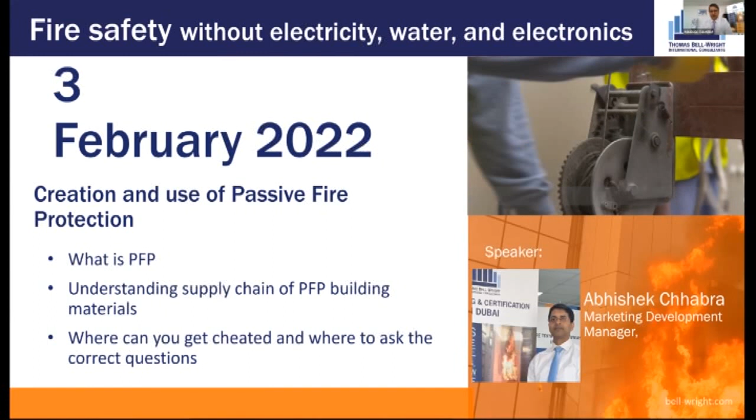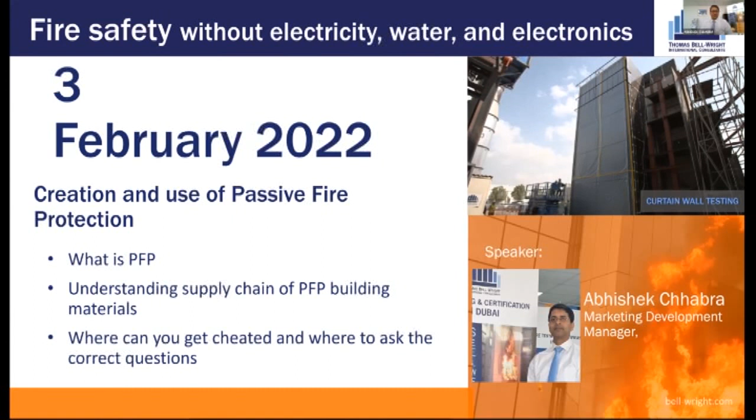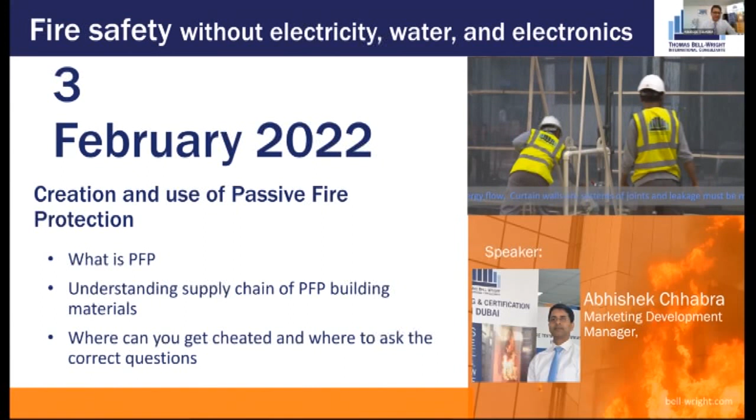Very good evening to Milind and Navdeep, Vikas, Vilas. Please do introduce yourselves. Hello Anil, good to see so many familiar faces coming online. Hello Sandeep. Do share where you are all logging in from. Hope everyone is safe and things are nice around you. Hello Hamid, Sandeep, Nishant, Amit. Good to see you, Nishant. Lots of good friends, familiar faces. Neeraj, Girish, Ganesh, hi. Baha, hi Baha, how are you? Good to see you all. Lots of names. Hello Vikas, Shiv, Siddhant, hello Hema.

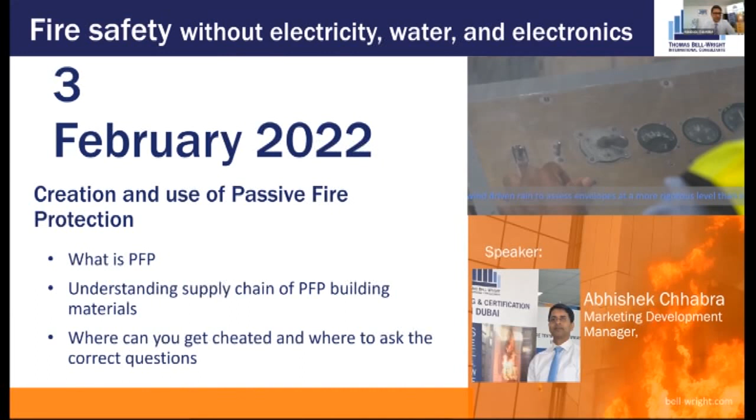Hi Sudhakar, thanks for the lovely introduction. Good to know you're working in Passive Fire. I will be in Mumbai in the week of 14th. Would love to connect up, maybe not coming to Gurgaon this time, but yes, we should connect. Thanks Sudhakar for the introduction.

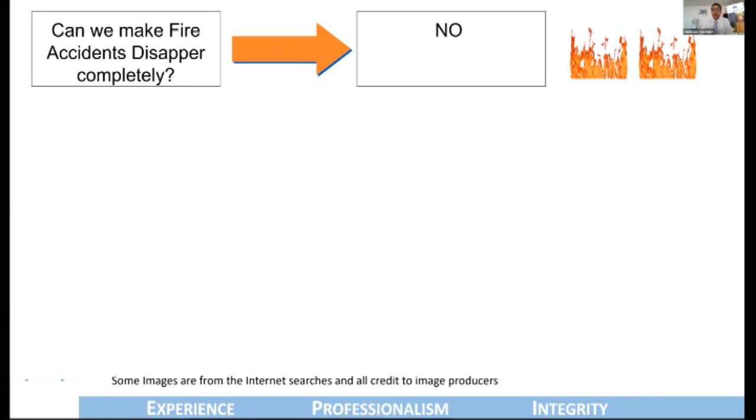There will always be small accidents, small incidents that will trigger a fire inside a building, inside a house, inside a shop, inside an airport, inside a hotel, inside a hospital - any imaginable place you can think of. There will be a source of potential ignition and some or other kind of mishap that will create a fire. So we can't really make a fire accident disappear. We know this. But what can we do?

We can do one of several things. We can make sure that the fire gets detected very quickly. We can make sure that wherever the fire is happening, there should be a means of egress so the place can be evacuated quickly. We should have a mechanism that is able to extinguish the fire, whether it's a small mechanism like a fire extinguisher or a sprinkler system, or maybe have the fire brigade come in, take charge, and control the fire, limiting it so that the small incident, which will always happen, will not become a big disaster. And we can all do this.

Like the caption of today's webinar says, we want to make sure there is inherent fire safety built in - something that does not require electricity, something that does not require water, but is still able to protect. So what can we do?

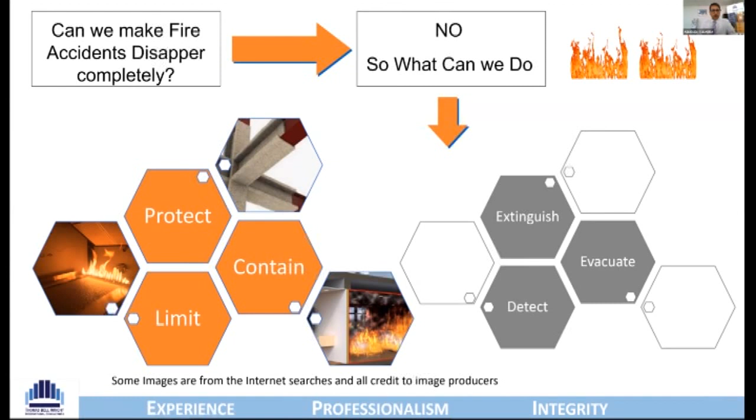I'm going to focus on three aspects today: what will make sure that the infrastructure we are in is protected from a fire, and if there is a fire incident, that it is contained within the compartment, the zone, or the section where the fire has started. If there is a small ingress of fire, it could be a matchstick falling on a carpet, a short circuit in the corner of a house or room, a stray candle, or so many other possibilities, we make sure these fires are limited.

So I want you all, wherever you are sitting, to take about 10 or 20 seconds to look around you and just think about where you are sitting. You could be in an office or a house, sitting on a table, a chair, or a bed. Look around the room that you are in.

Imagine if there is a fire that breaks out somewhere around you, what would happen? Please do this exercise with me. Imagine there are windows around you, hopefully a door somewhere, and a roof above, maybe a false ceiling. I'm running a small video on your screen for you to imagine when a fire gets initiated, how it spreads across the room.

Are you with me? I hope you are all able to imagine, look around, and think of all the things that will burn, some more quickly, some less quickly. Where will the fire move? Will it be contained within the room where you are? Do you think the door, wherever it is, will be able to lock the fire and smoke within the room? Will it burst out of the window?

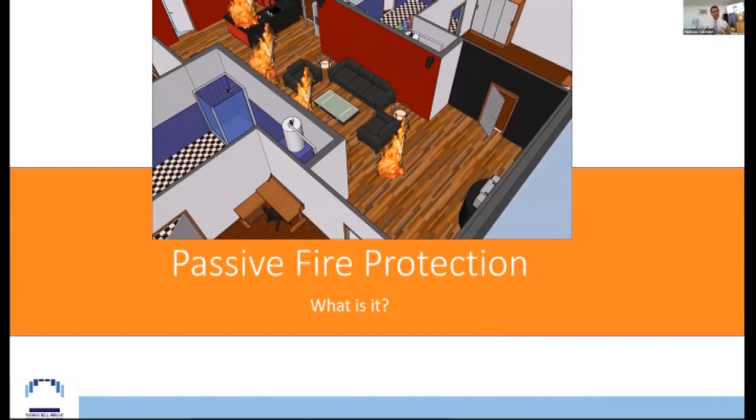This all forms the basis and the crux of how fire protection gets designed across the world in buildings. We have codes, standards, regulations, and requirements detailed in hundreds of thousands of words and pages, but in basic essence, this is what we are looking at.

We know there will be a fire. We have to understand, from a very scientific point of view, how quickly it can be detected and controlled, and design an egress so that everybody who can potentially be in harm's way can exit and evacuate. On the other side, we have passive fire protection, which means if there is a carpet on the floor, a false ceiling, or a decoration on the wall, this will not make the fire run and grow quickly.

What will be the fire load? How much can the fire grow? And when this fire is growing faster and quicker, we have elements in the room like a fire-rated door, fire-rated partition walls, fire-rated roofs, and fire-rated perimeter fire barriers between the windows or glazing and the floor. All those elements are in place to make sure the fire is contained within the compartment that has been created.

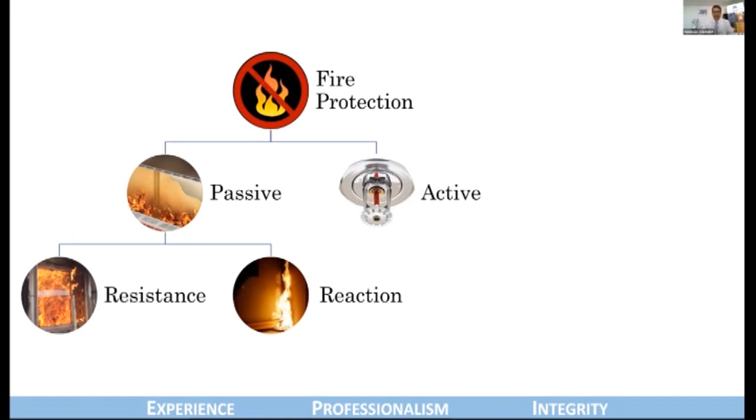This very simply is what is called passive fire protection. It usually gets grouped into three segments. Containment, which means if and when there is a fire, it should be containable either in a room or the floor, or by whatever methodology has been designed by a fire code, keeping in mind the occupancy type.

If you are in a hospital, the methodology to contain a fire will be very different compared to if you are in a mall, an airport, a residential or commercial building, or a place of worship. All these categorizations define how many people there are and their preparedness to evacuate or act when there is a fire. All of this is beautifully captured and recorded in various building codes, whether it is the National Building Code of India, the International Building Code published out of North America, or one of several other building codes around the world.

These building codes will define how many hours the containment of, let's say, the banquet hall of a hotel, which could seat 2,000 people, should function. How long will it take to evacuate people?

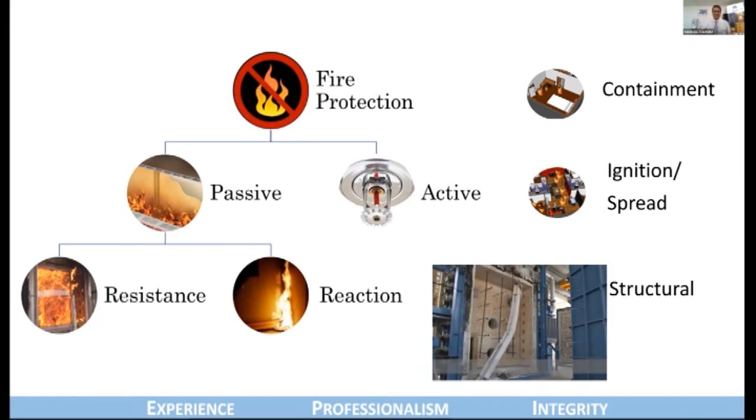Let's take a better look into what reaction, resistance, and all of this is about. I will start with materials, stuff that probably you can see around. Maybe you can see some table or pieces of paper on it. I am very sure you can see something around you in some form of plastic.

And plastic is a big category, but you would definitely have paper somewhere inside, and plastic somewhere inside. I want you to imagine, if you light up the piece of paper with a matchstick or a lighter, you will all agree it ignites very, very quickly. And a plastic chair or a plastic bottle or a water dispenser may not necessarily ignite with the help of this lighter.

As you imagine the lighting up of fire - and I urge none of you to do this right now, please don't try to light up something around you just to follow the webinar - you will realize that paper could ignite very quickly, but not necessarily create a lot of energy. Its calorific value or fuel load will be low.

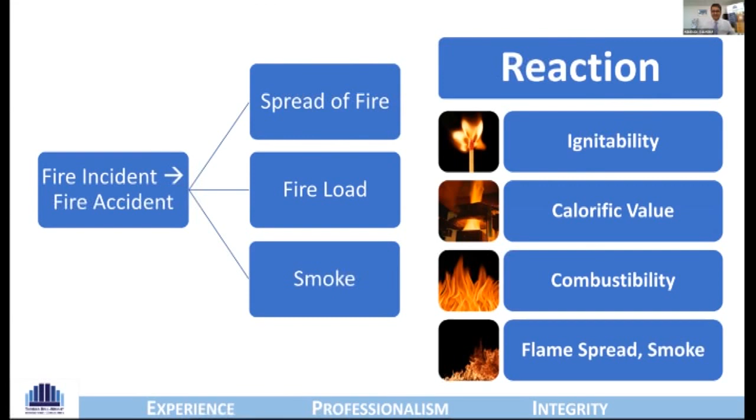I move to my favorite subject, which is compartmentalization of fire. Very unfortunately, it is half understood or semi-understood by most people. The ill result of this half understanding is that many times developers, contractors, consultants, governments spend a lot of money defining that a room should have a 2-hour fire rated door. But if the wall is not fire rated, or if the mechanical, electrical, or plumbing MEP systems break in and cut open the fire rated wall and do not seal it back properly, then the huge amounts of money paid to manufacturers, some of whom are actually today in this session, is wasted.

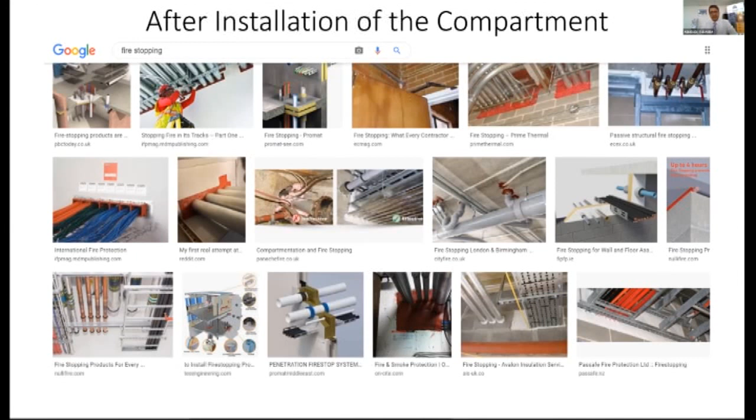Let's look into how this is actually and practically done in real life. Three aspects are important. Who is the manufacturer of the product? You should imagine a fire door, a partition wall, fire stopping products, all sorts of systems and materials that you see all around you, above and below, which are capable of creating this containment.

We need to ratify and check whether these manufacturers are able to deliver the right product repeatedly - not just test one product and give you a test report, but supply products that will always comply to what they claim to comply. Who installs these products?

Are the installers capable? Are they trained? Is there someone checking their work? Or are you wasting money designing and procuring very good products and getting them installed wrongly, wasting all of the money spent?

And most important, if you are paying somebody - if you are a developer, a contractor - are they liable for ensuring what they are delivering? Is that liability written somewhere on a piece of contract or a document? Is there money attached to it? There better be money attached to it.

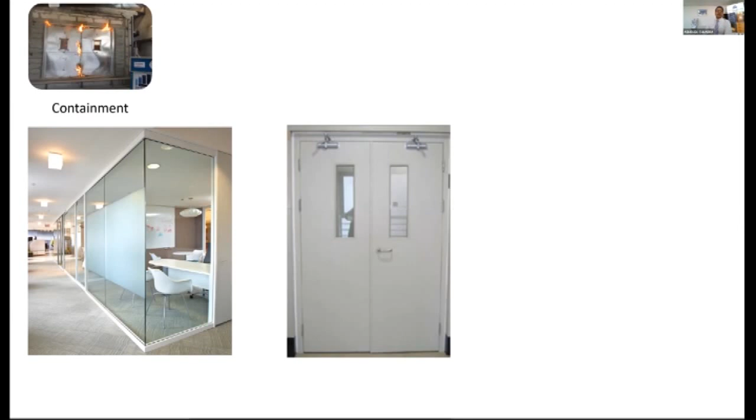Just to aid your imagination so that you better understand what I'm talking of - imagine, as in the top left corner of your screens, you see a fire door being tested, which means the fire door is installed with a furnace behind, and fire leaking out, which means the fire is not being contained. And below you see images of systems and products like a fire door or a glazing system that is supposed to implement or contain the fire. Then imagine all that goes behind it.

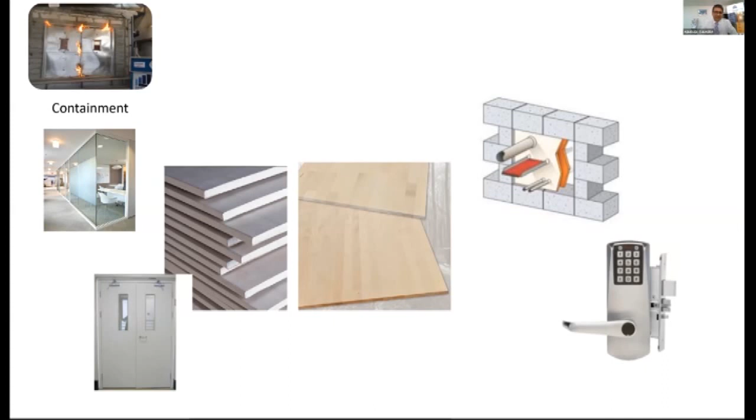Who is manufacturing using boards, wood, sheet metal, hardware, etc. We need to find a mechanism to ensure that this is being done correctly and repeatably. Exactly the same set of things I want you to imagine for anything and everything that you look around - interior finishing materials and products, upholstery, carpets, flooring, false ceiling, furnishing done on the walls, wallpaper.

Will they catch fire? Maybe, maybe not. But where are they manufactured? How are they manufactured? Is there a quality assurance mechanism in place or not?

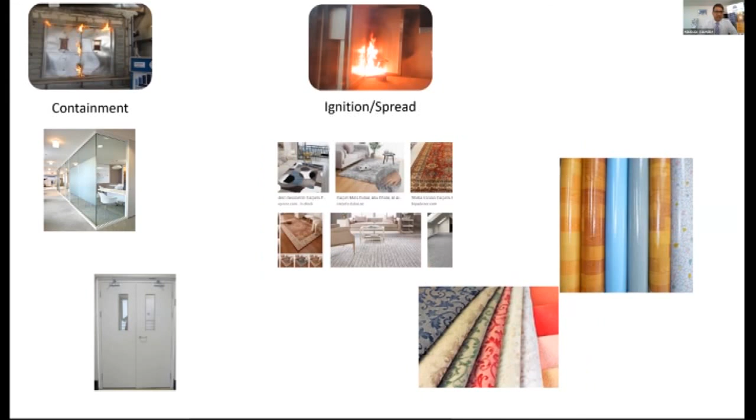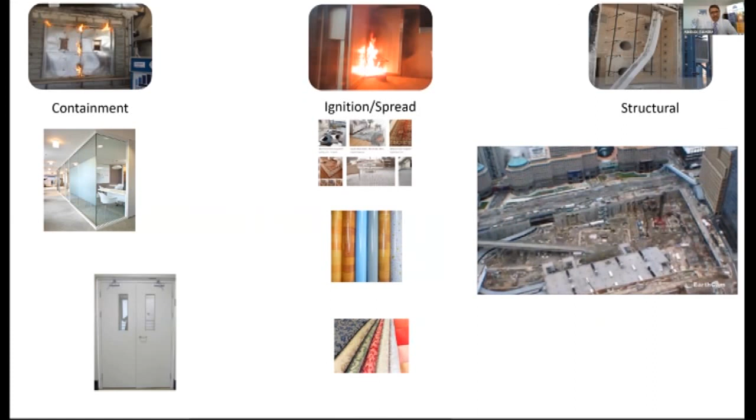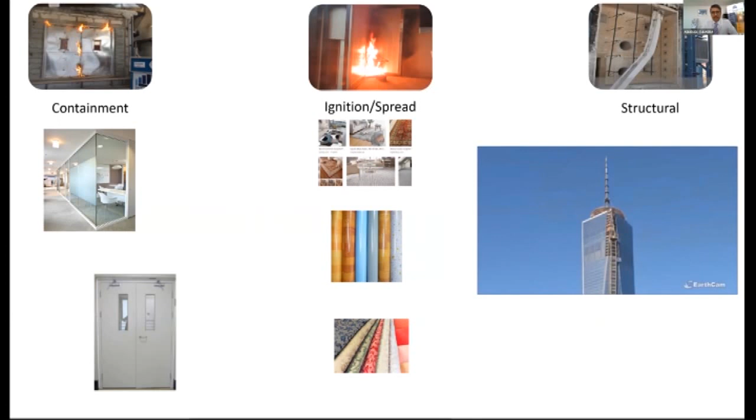Structural fire protection is a subject probably for another presentation. But whenever a fully developed fire is attacking the structure of a building, like the world saw when the tragedy of 9/11 happened - and this is a video of the building which is the place of the tragedy - the world realized and understood much better that when the fire temperature is beyond, let's say, 500 to 600 degrees for a prolonged amount of time, the structure can potentially collapse.

And hence, a lot of coatings, intumescents, and many other methodologies and products, sometimes boards, are used to bolster the structural strength of columns and beams to make sure that there is structural strength in the building. How is this evaluated? How is this tested?

If a column is slightly rusted and the intumescent is coated on top, and the intumescent is not able to hold correctly to the column, then procuring the column, paying through your nose for the intumescent coatings probably imported internationally, and paying someone to install it incorrectly, is losing all the money. So it is critical and important to understand this. And I cannot impress more upon...

...misunderstanding of through penetrations and the amount of money spent on it. Roughly 35% of contract value of any construction is spent on MEP - 35%. So if you spend 100 crores building something, you spend 35 crore rupees on MEP. And having a wrong installer, an ill-qualified installer, will break the through penetrations, the compartment, and not fill it properly. So imagine the impact.

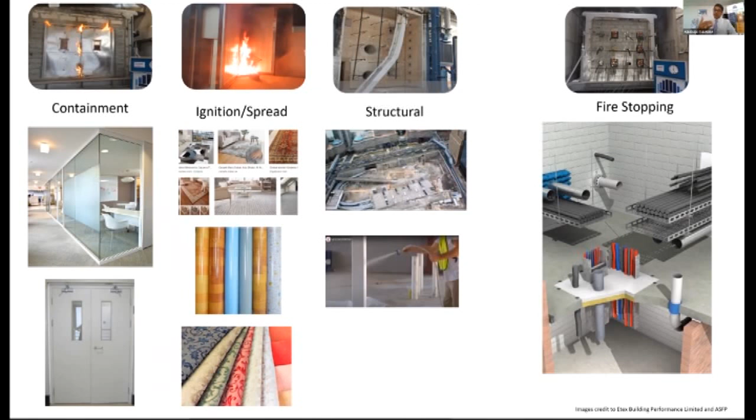So it is critical to understand how the installations are done, whether they are certified and listed. Is there an inspector involved to check and make sure that these are being installed correctly or not?

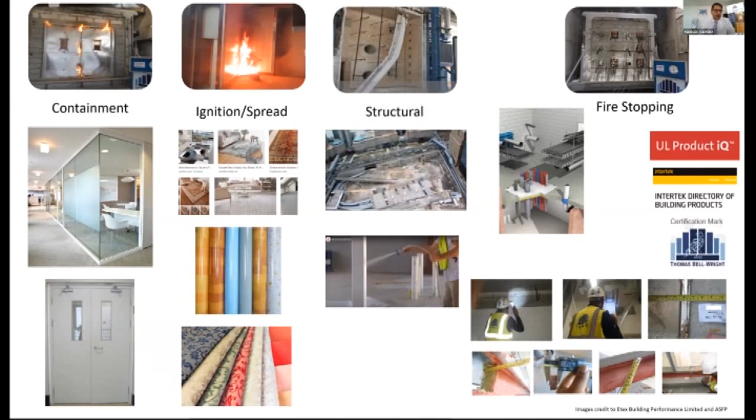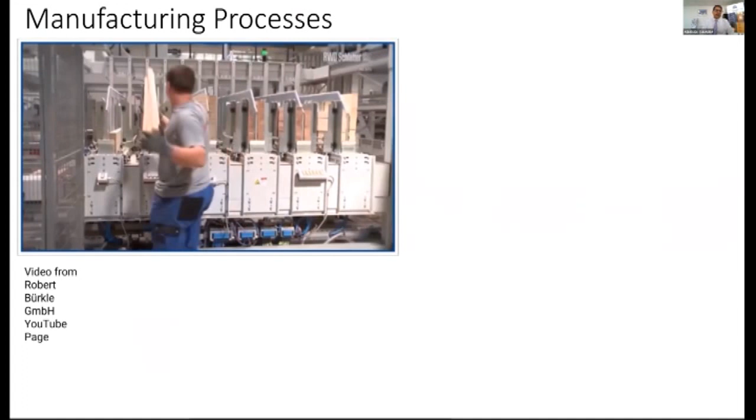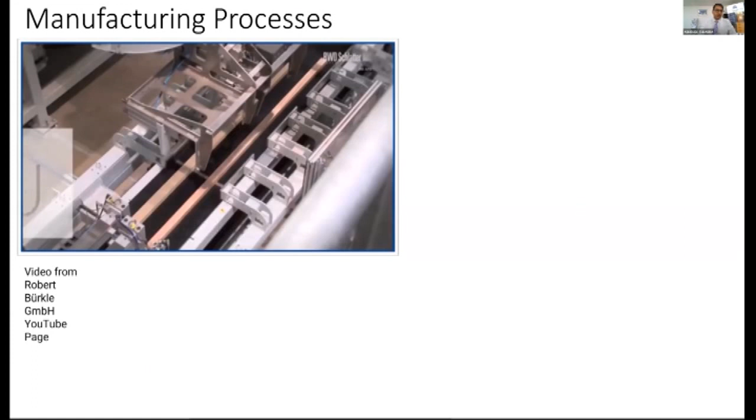Why is this important? I want to bring your eyes back to manufacturing as a process. It's easy for people to imagine that fire doors are manufactured like an automotive production line, everything happening on its own with minimal human intervention, everything automated. But reality is very different.

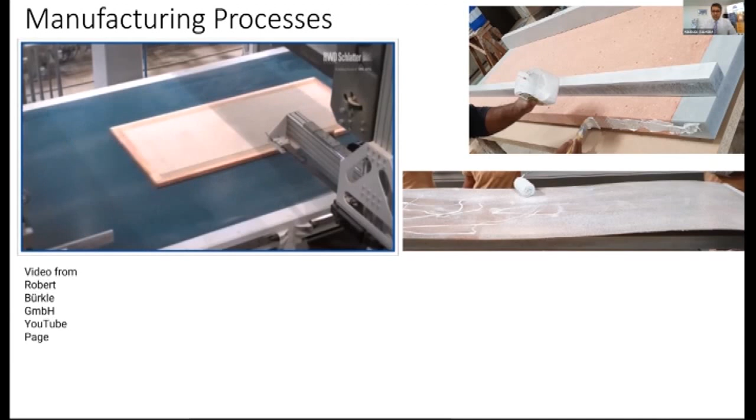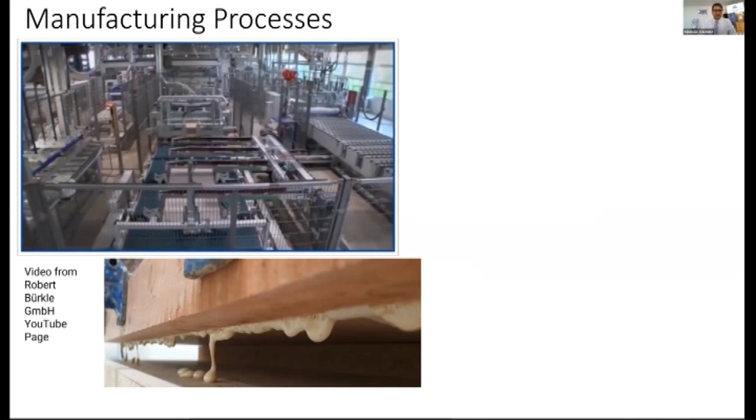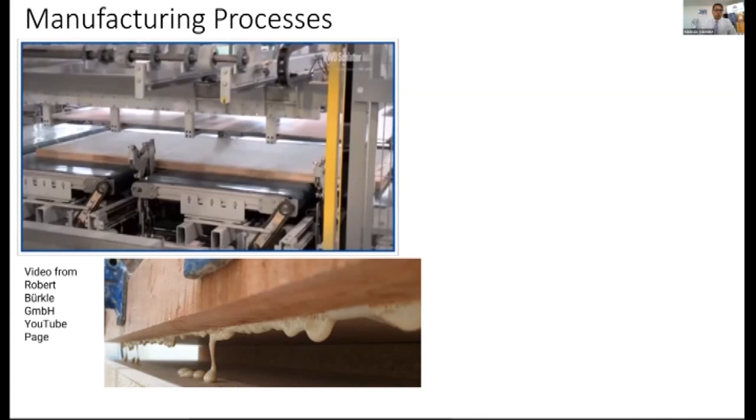I know there are some fire door manufacturers here, and I hope they don't get offended, but manufacturing and assembling a fire door has a lot of manual work, not just in India but worldwide. Using sealants, intumescent strips, and loads of components which bring about fire resistance, if done incorrectly, would produce a different door. So it is important that somebody is overseeing and ensuring this process is done correctly.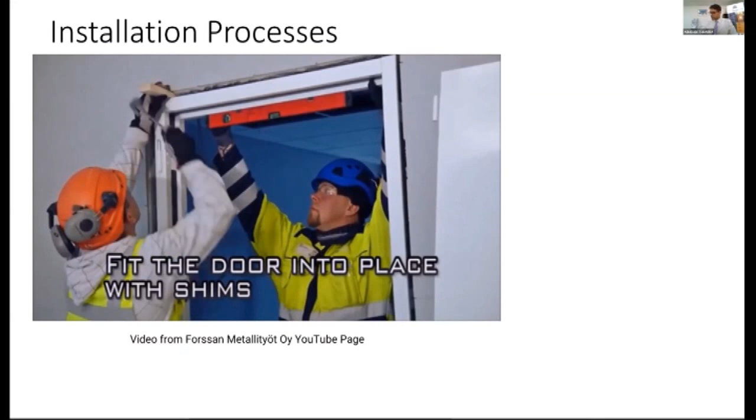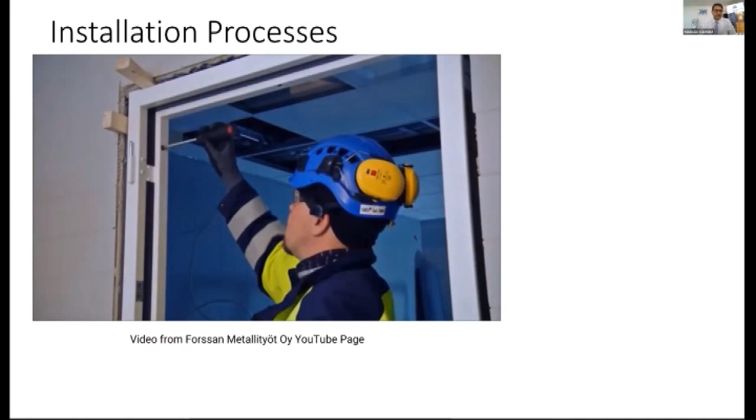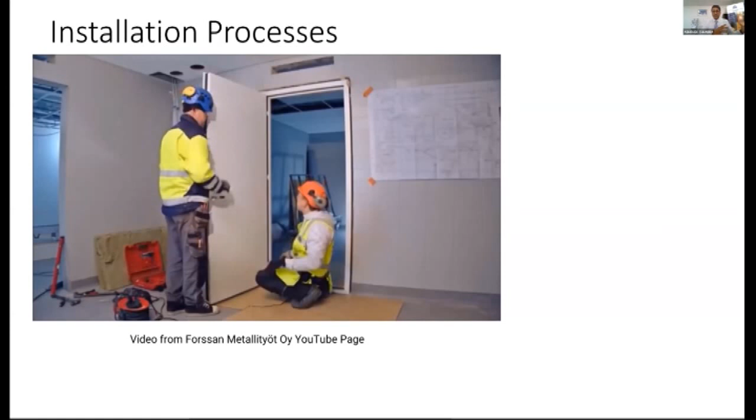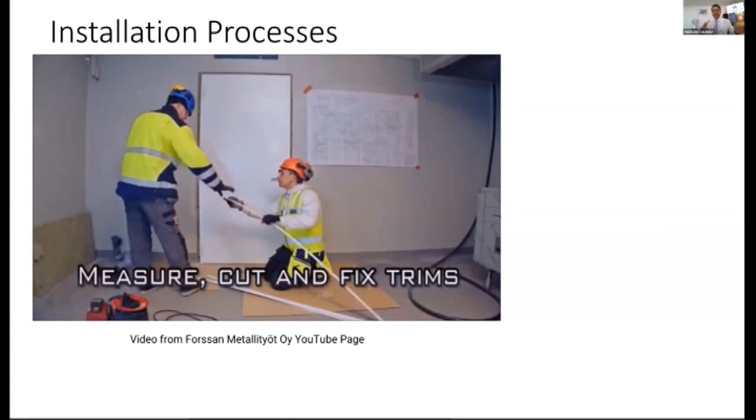The same goes for installation. This is extremely important work, often misunderstood. The liability that a fire door will perform as a fire door primarily goes on the manufacturer of the fire door, the same manufacturer who will install the fire door correctly, very well, in a laboratory to test it. And it can be your guess that the experts who install the fire door inside a laboratory, when they are spending a few lakh rupees to test it, who these installers will be, what will be their capability, and does this equate with the capability of the installers at the construction site?

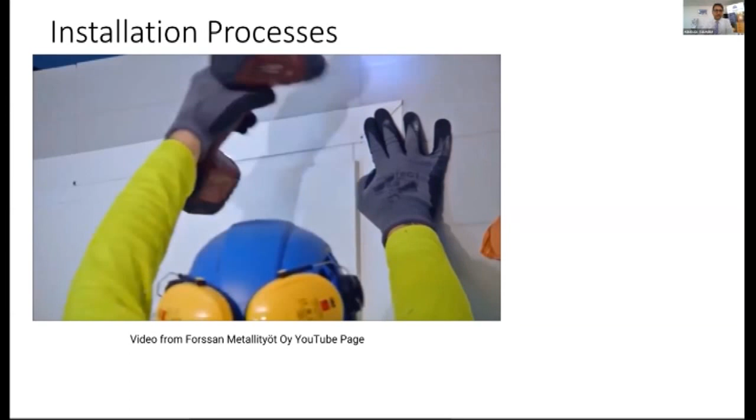And if it does not equate, then all the money being spent is probably being wasted. So it is critical for you to know and understand that the liability, which typically comes from an installation process, which has to be issued ideally by the manufacturer, is verified, and there is some mechanism to assure it.

Which brings me to the last section of today's conversation and discussion, which is assurance mechanisms. How do you make sure, wherever you are - you could be a manufacturer, a buyer, a seller, a contractor, a consultant, a property dealer, or an insurer. There are so many people today in today's session.

Well, we could start with just the basics: have a building code and follow it to the T, exactly, correctly. And in every building code, you will see test methods, like what are the test methods used to check and validate compartmentalization.

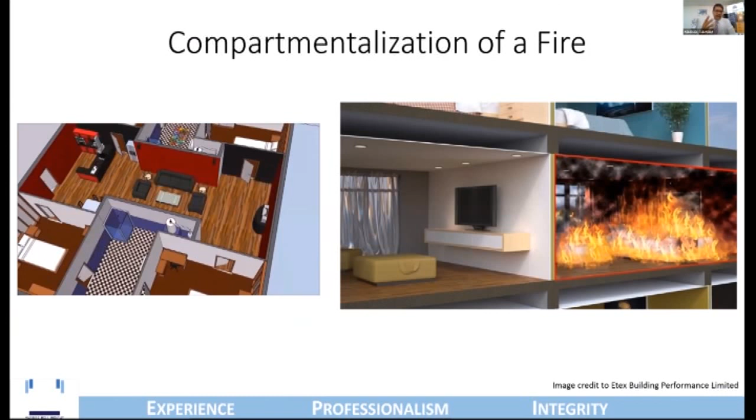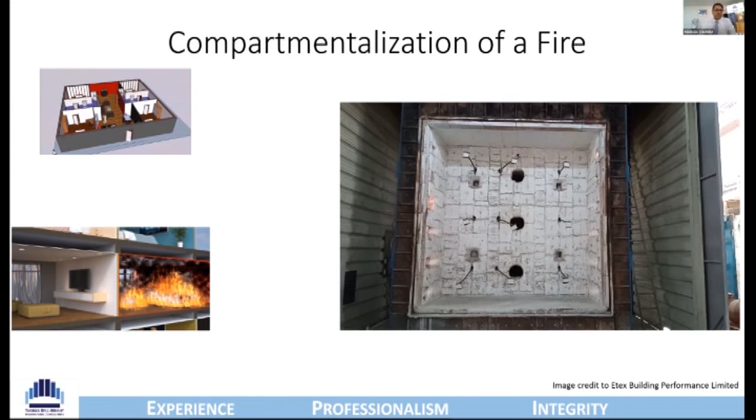I'll show you an example. This is a fire resistance furnace, from our laboratory. It is a 3 meter by 3 meter opening where a fire scene or fire load is recreated. How this recreation works is that this face is closed off with a wall. The wall could have fire doors installed.

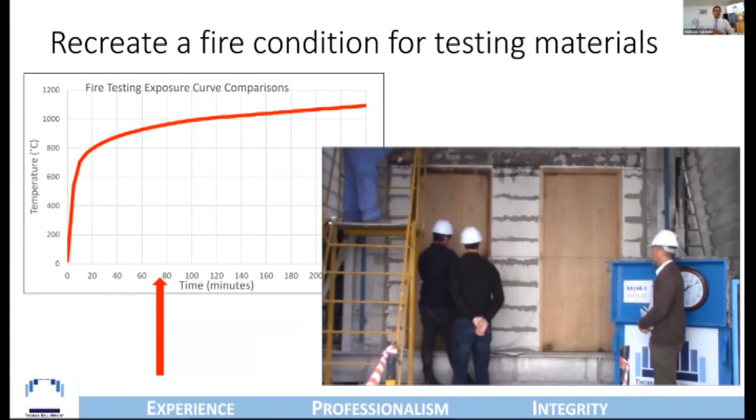And a typical test method, which could be a British standard, an American standard, a European standard, or an Indian standard, the IS 3614, would recreate such a scenario.

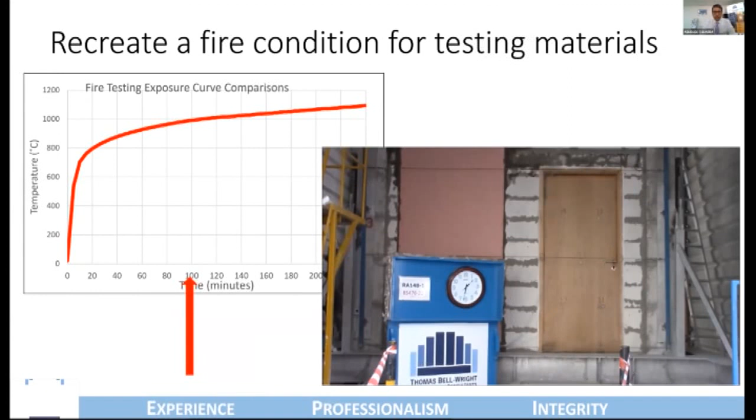Now I want to ask a quick question, and people can reply in the chat as quickly as you can. How many people in the audience have seen a test report for a fire door? Can I have some quick answers in the chat box? How many people have seen a test report? Never - I like that answer. Anybody else? Are there just two people in the audience who have tested?

Sudhakar, good to know, CBRI. Rajesh, Sudhir, no. Anybody else who has seen? Yes, no. Okay, I see 4, 5, 6 people who have seen a test report. Oh fantastic, lots of no's, some yeses. We asked for a test report but it was not shared by the vendor - that's very sad, Shubham, please don't give them the money. Anybody else who has seen a fire door test report?

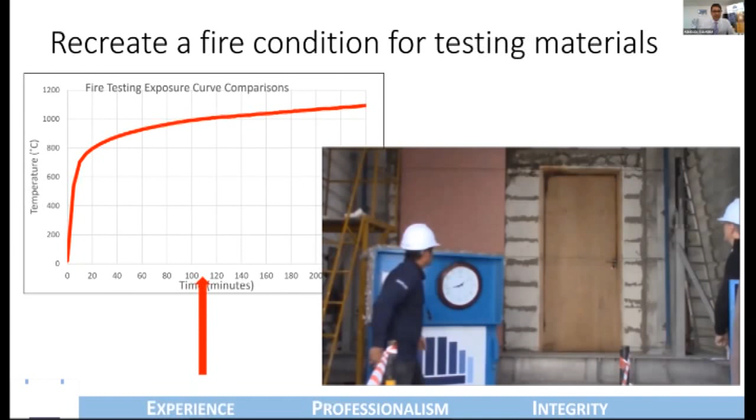Okay, because there are lots of people who've never seen a fire test report, you are in luck. I'm going to share one with you on the screen. Thanks, Nitin and Ram, Ramalingam, Sheikh, good to get your answers. Vikas, you have seen one.

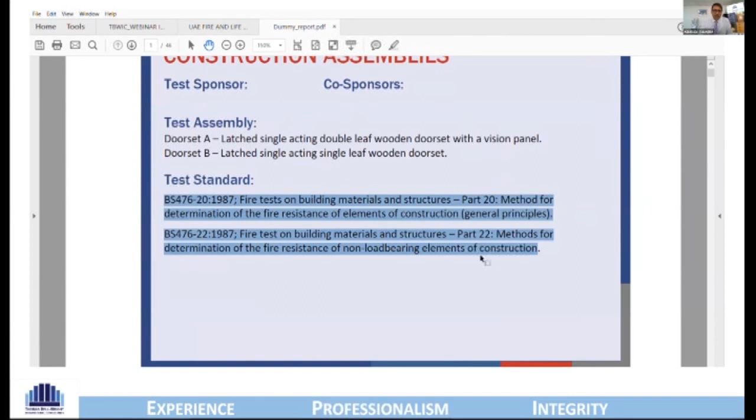Very good, Vikas. And all the people who've seen a test report, I want you to put your eyes on the screen and notice which of these aspects did you ever see, which are very important. When was the test conducted? What was the test standard? Did you notice the accreditation?

Which is the body, like United Kingdom Accreditation Services or NABL from India or any other accreditation body, who is checking how the laboratory is able to repeatably conduct the test? And I'm bringing out these things because all the people who have seen a test report, and all of you who may have never seen one, must ensure that you check when the test was conducted, as per which standard.

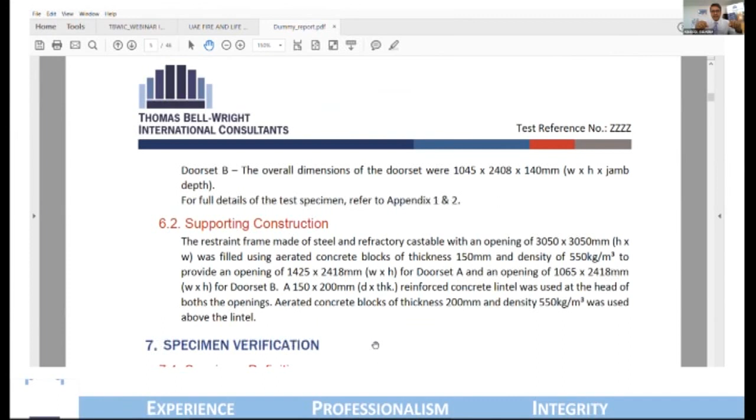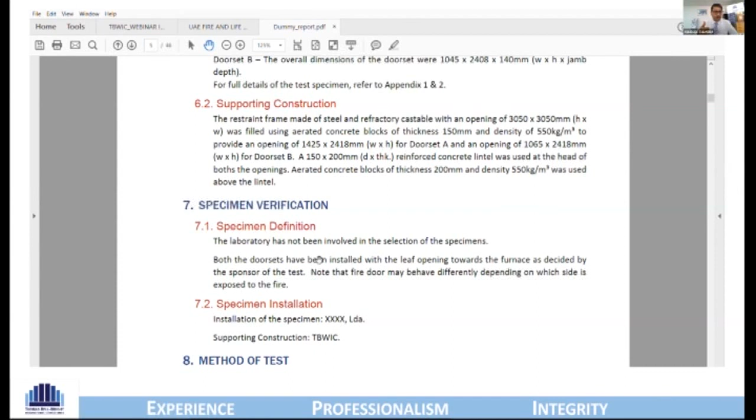Who were the people witnessing the tests? And very, very importantly, understanding the construction defined in the test. For example, if it is a fire-rated door, what was the size? How was the product defined in the test report?

And very important, most important, where did the door come from? Was there anybody involved in making sure that the door has been sampled? Was it conditioned in a specific environment for a long duration of time?

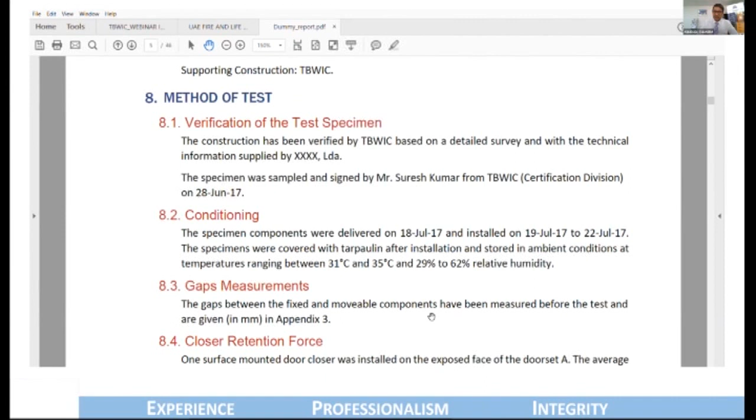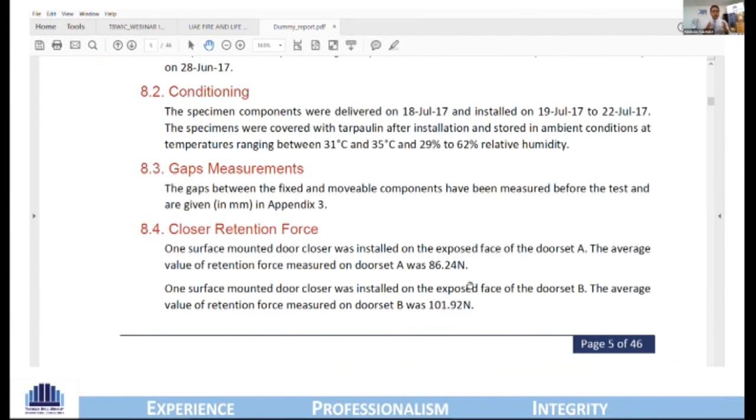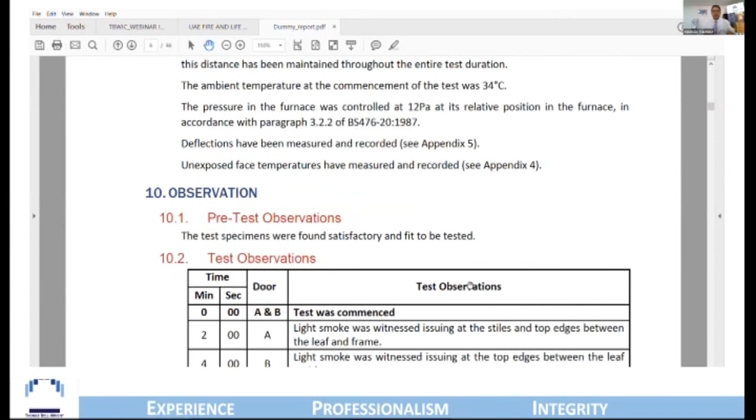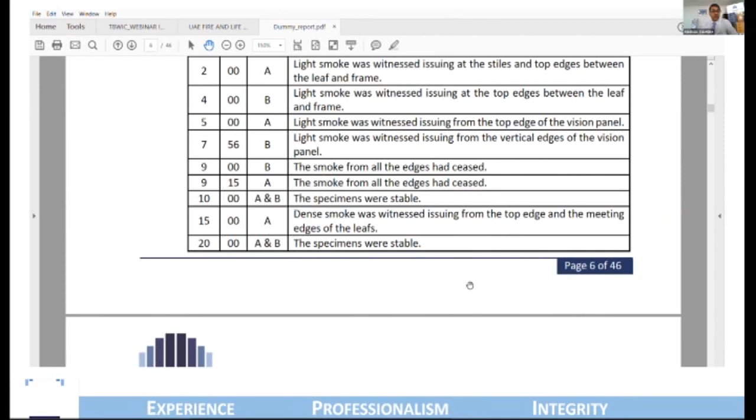This is all very, very important because you, at a point of time, need to compare this with what will be supplied. This is probably the only proof or assurance mechanism you may have for comparing what will come on the construction site, or what is on the construction site, versus the proof you are getting from a supplier or manufacturer that my fire door will function as a fire-rated compartment element and ensure the fire will be contained by this fire door.

And this is extremely important because if it doesn't do that, then what is the point? So once you understand, and very well understand, how this fire door works, you will have a better appreciation of how this functions.

In the National Building Code of India, there are several Indian test methods which are defined, which mandate compliance requirements, or which define how these tests should be performed.

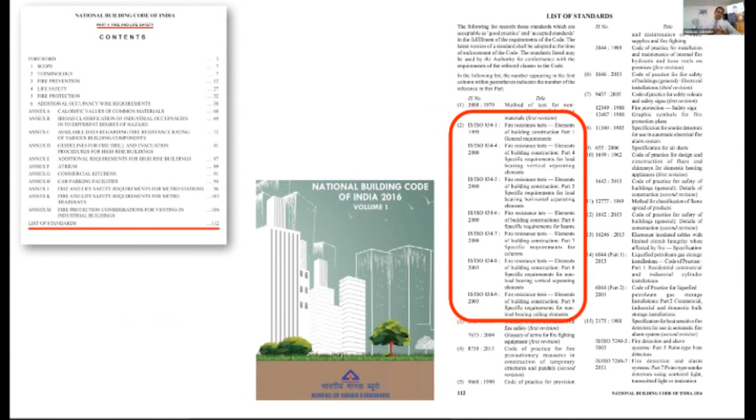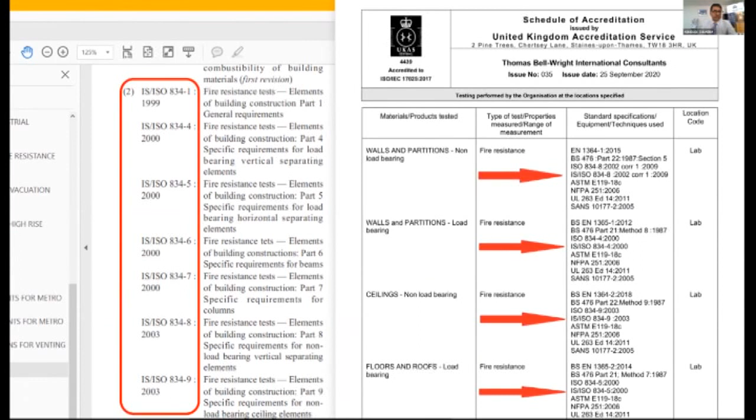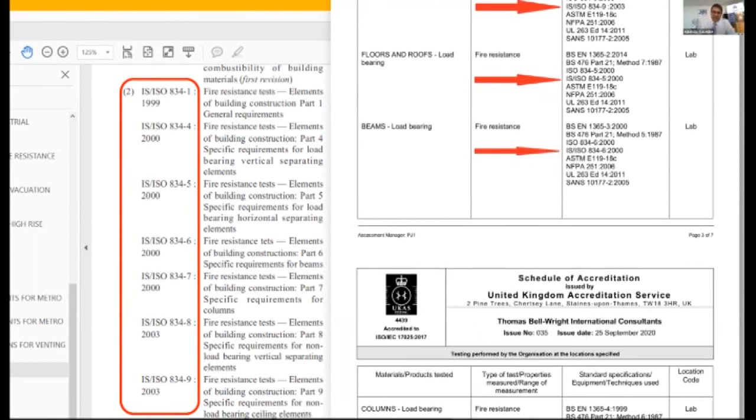And I'm very excited and happy to share that as a laboratory, we have been internationally recognized and accredited, which means someone from the United Kingdom, as an accreditation body, comes and audits us, ensuring repeatability in being able to test as per these Indian standards.

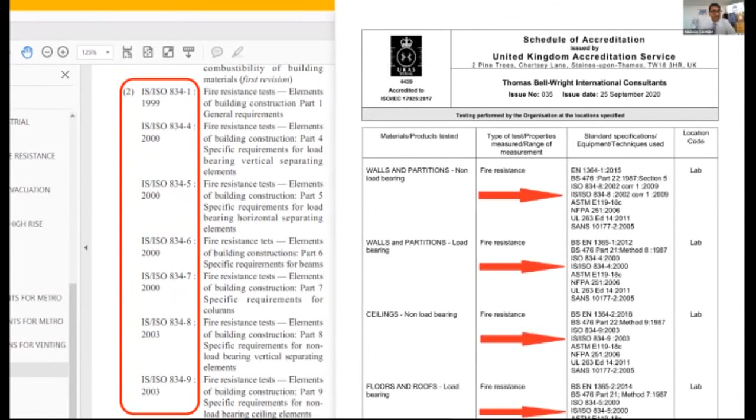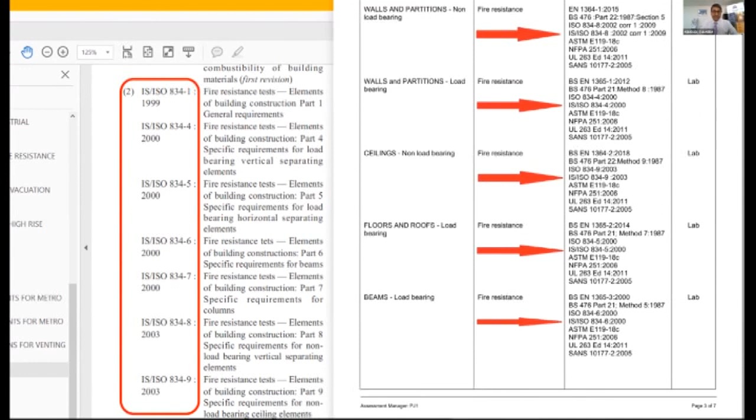We are probably the only UKAS accredited laboratory in the whole world, I must say, who can test as per 10 Indian standards, which are referenced in the National Building Code.

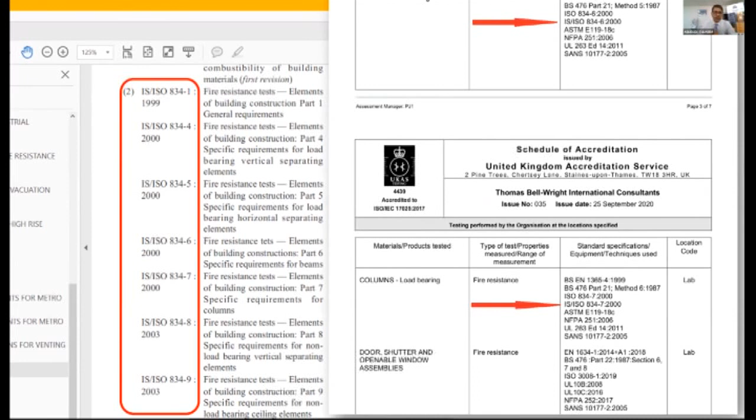And not only can we test them, we can issue certification and listing on our certification directory, which means we undertake a process of going to the manufacturer's premises, witnessing how the product is being manufactured, and then not only test the traced product, which could be the fire door, we go back to the manufacturing location and audit them each time.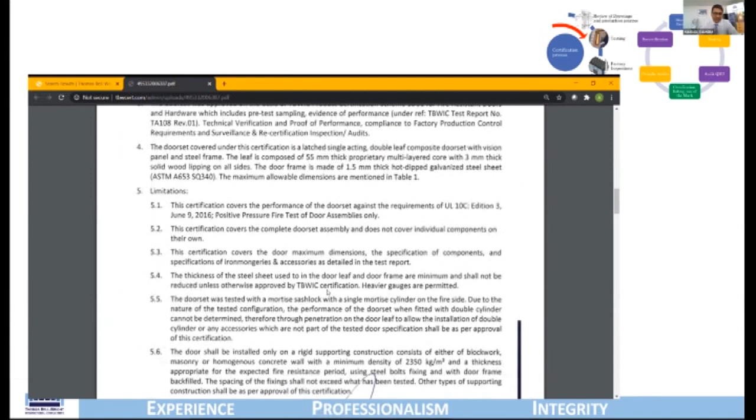And all those details get listed on the certification directory. So as a buyer, as a verifier, you can look up that the product has been tested to UL 10C, for example, as an American standard, or an NFPA standard, or an Indian standard, IS 3614, and it is complying with these details, this size, this dimension, this hardware.

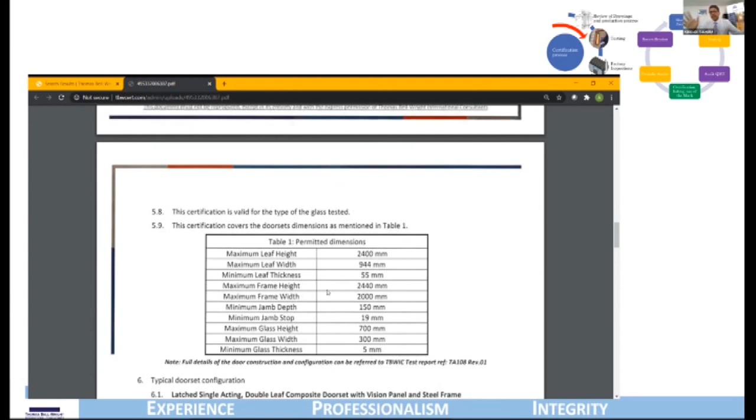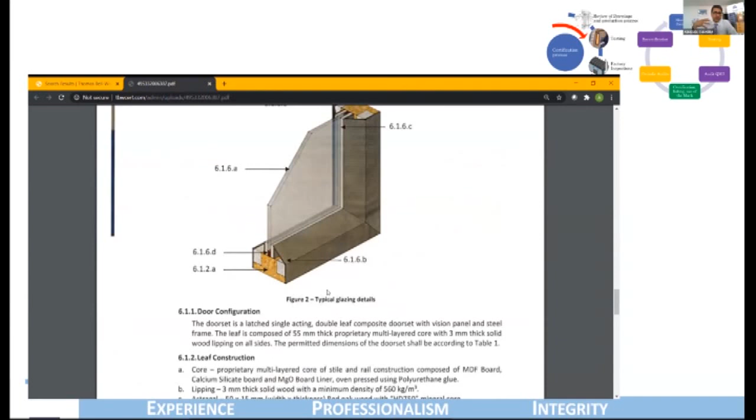And if any of these things are listed on the certification directory as an open certification directory, then the third-party body is taking assurance of the performance of the product. You're all welcome to look at our certification directory, TBW Cert, www.tbwcert.com, and you can look up how the products which are listed look like.

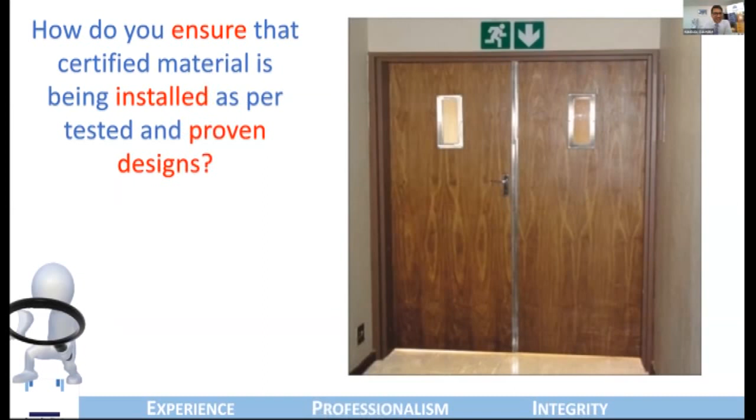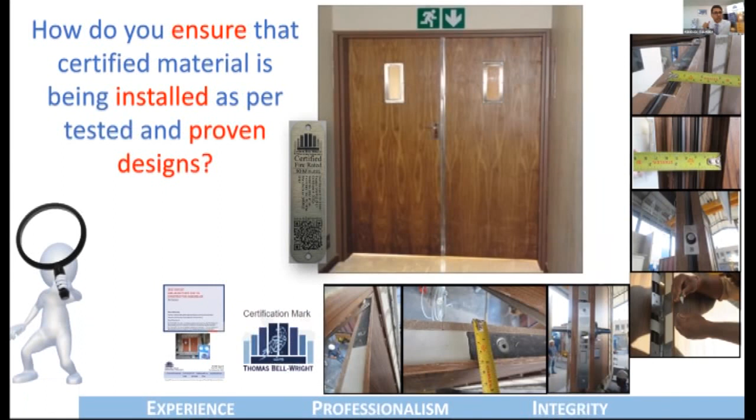And all this listing detail is then verifiable at the construction site. Not only will we have a certification label, which will link to the directory, but it will also provide all those details which are important for you to look at the drawing and then look at the construction site and see whether the product has been listed in the same way.

And these listing details are for everything. They could be fire stopping, what is the gap, what is the thickness, all sorts of details which you probably should be asking.

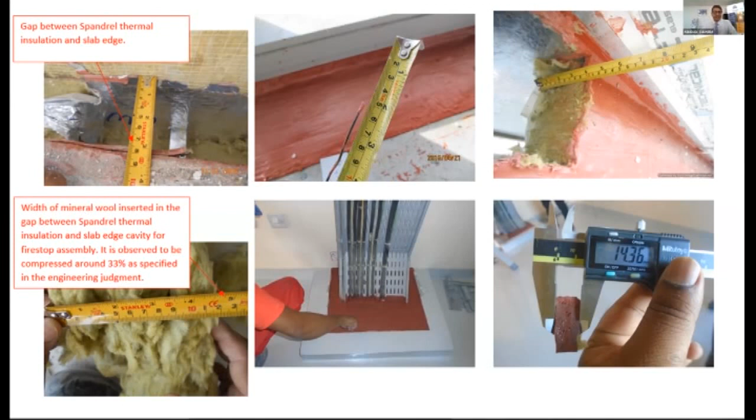So just to make sure that you do not get cheated throughout the course of the process, where passive fire protection, something that will ensure the life safety of people, is being procured correctly, you have the right assurance mechanism. And these are some of the questions you should be asking.

Where is the product manufactured? What is the evidence? Is it just a test report? Or is there someone visiting the factory? Is there someone certifying the factory to make that product over and over again? Who is installing it? Are they having some kind of liability warranty?

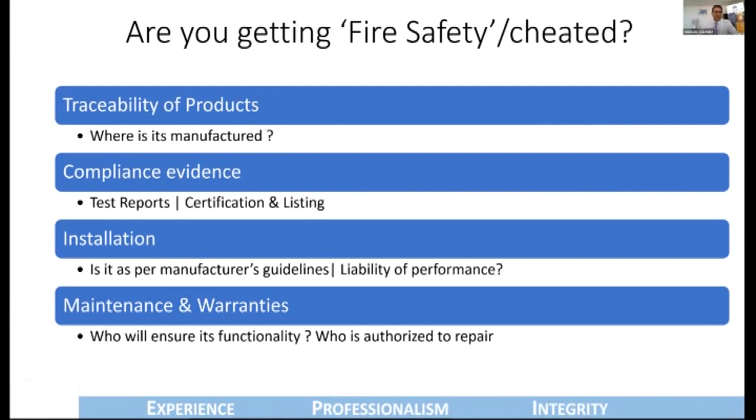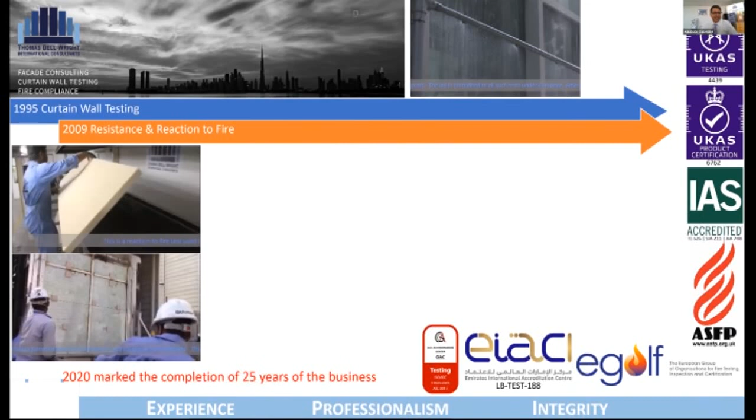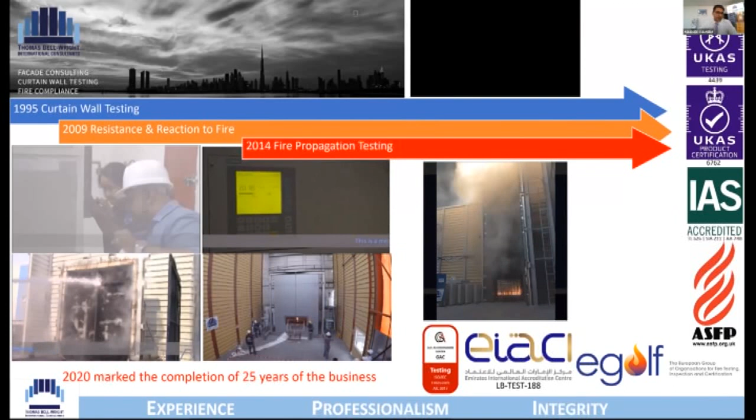I know many questions have been coming in, and I'll quickly give a background about the company. We've been around for 27 years, mainly doing curtain wall testing, but a considerable portion of our existence does fire testing. We have 4 large furnaces, horizontal, vertical, load-bearing, to do fire resistance testing as per American, British, and Indian standards. We have been the subcontract laboratory for UL, Intertek, and Warrington Fire, and we have the largest capability to do small-scale reaction to fire tests, as well as very large-scale fire propagation tests for cladding. That's a quick background.